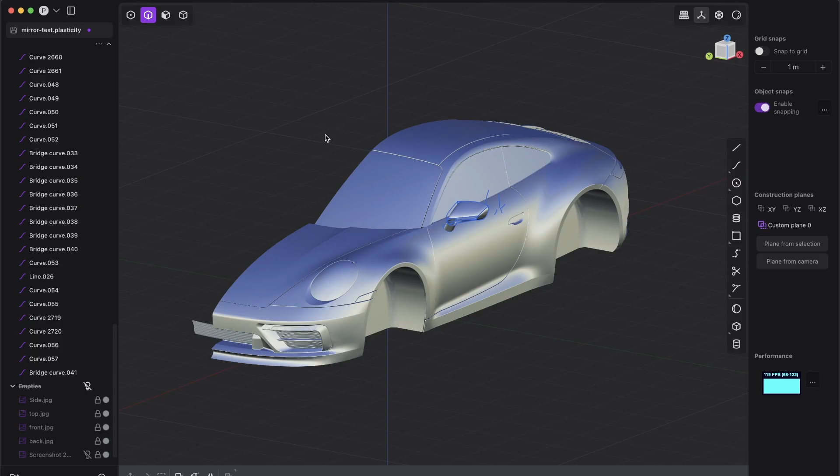But we have here this, I don't know, it's such a beautiful design. Look how organic this is, it's such a beautiful thing. And the interesting thing is, so if we check out, and just let me hide all of those curves. So here you see we have created already this beautiful smooth shape and everything looks super nice and organic and connected, right?

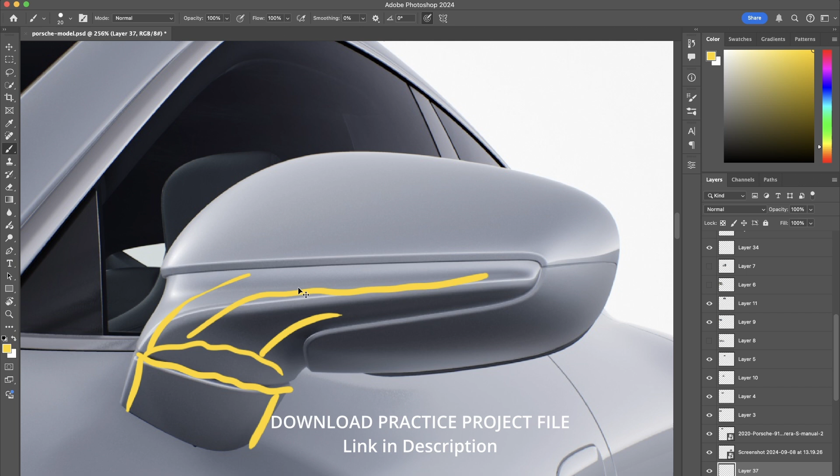And now, before I connect this holding piece, what we have already created here, we have this thing here, right? And we have that thing on the top, and this piece to connect, this is such fun because look, we have so much surface depth and interesting shapes. But anyway, we have our outer mirror here, but you see we have this little chamfer here, right? And this is extremely important because without this chamfer this wouldn't look so good.

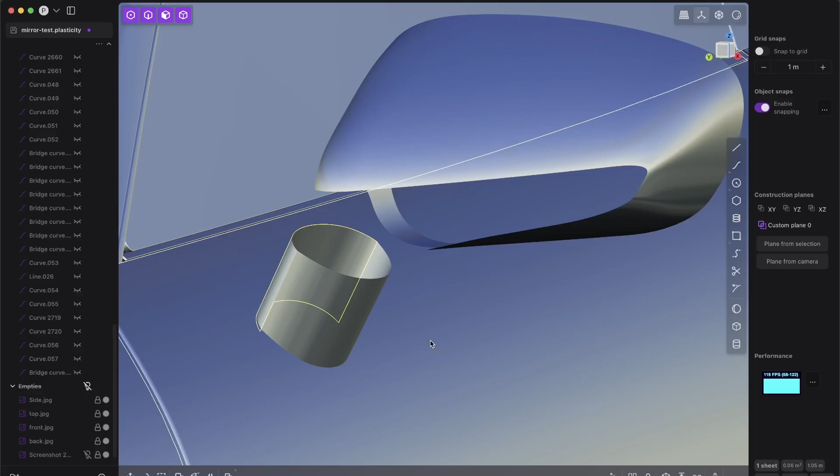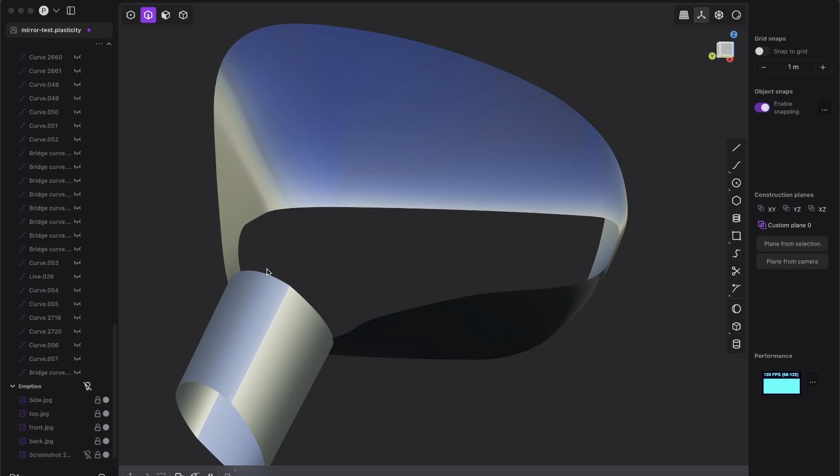And this chamfer goes all around the round complex surface, right? So exactly what we have here. Let me hide our car and all of its pieces. And right, we have this massive complex edge ongoing. So how can you add now this chamfer? How can we add this perfect little detail that will go completely all around with one clean surface? So you can just pause the video and try to think.

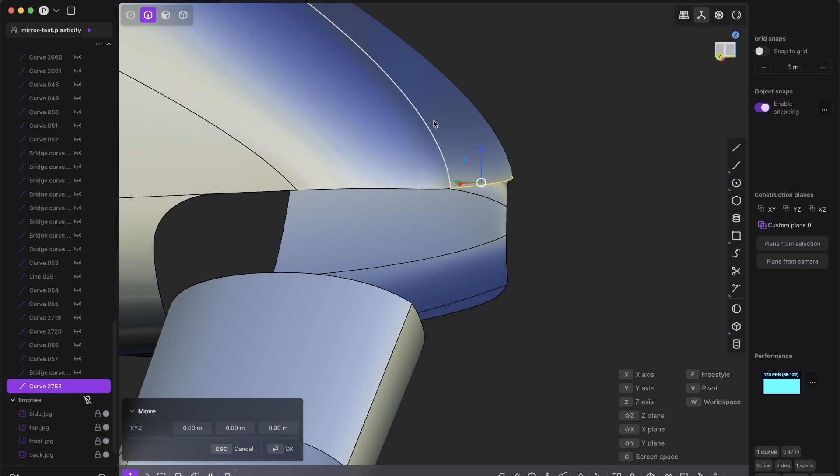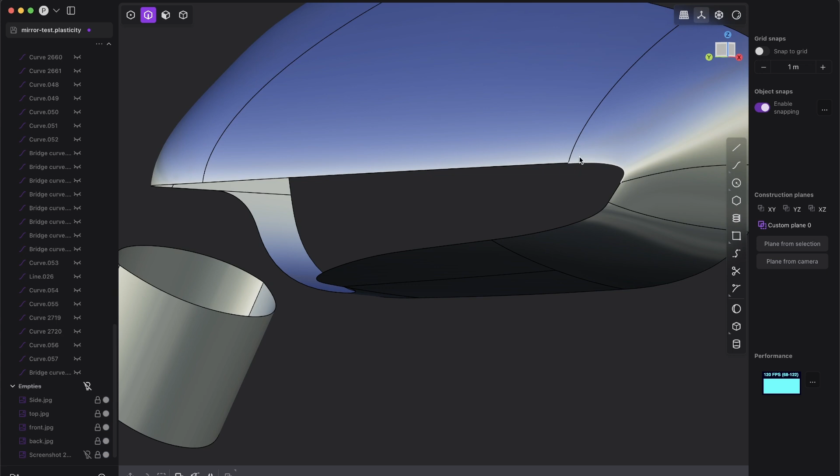And maybe someone starts to think, I don't even know where to start. Maybe I have to create this surface first and then maybe I can offset and then I can chamfer or something. Or maybe I will just duplicate this curve and then offset that and then start to chamfer that, and maybe I have to do it here as well and go one by one. Then it will take you till Christmas and you will not get one super continuous clean surface because the distance will always be off.

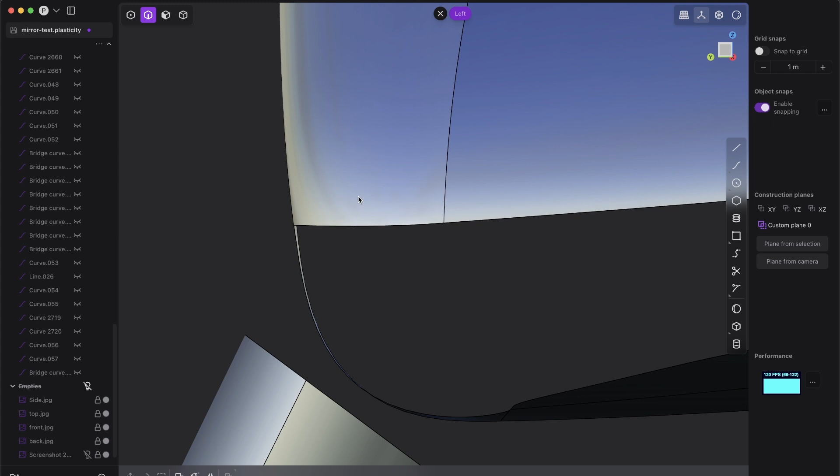So an absolutely amazing trick that I will show you here. And you can use that always, or most of the time, for such complex edge flow and organic surfaces. So we want to create a little line. So I will create a line, and I just snap to any point, doesn't matter where. So I just snap it here. And I will just kind of create the profile of our little chamfer. So something like that, right?

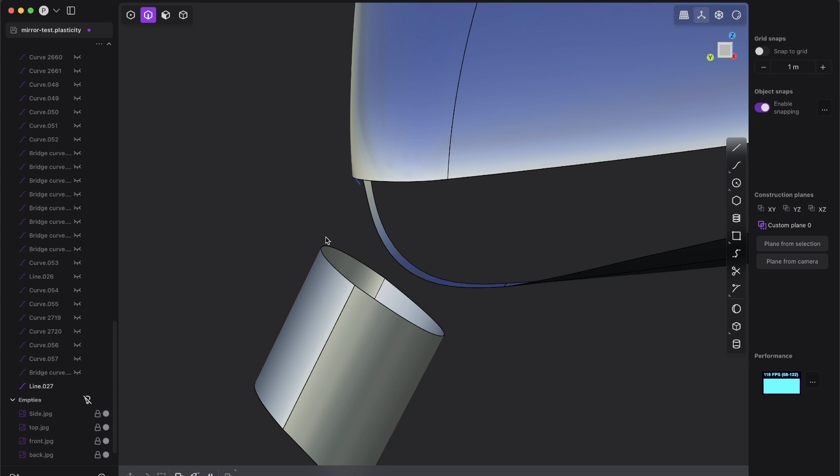And now I just want this profile to go all around that nice edge. But how can we do that? So maybe someone thinks, oh okay, I can just select this edge here and duplicate it with Shift D. Then I can just sweep it, bam. If you thought this way, then you are not so far away because it's almost what we will do, but you can't just sweep that around, right? Because again, this is way too complex an edge flow.

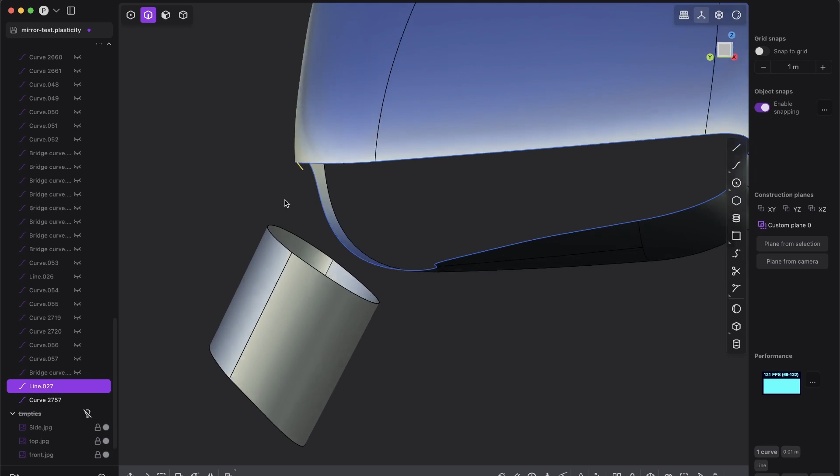So what we want to do is select this edge that we just duplicated and unjoin. So Alt J, and now we have all of those separate pieces. And now we want to just break it down into 2 or 3 pieces. So I will select a few of those pieces. So yeah, I think something like that.

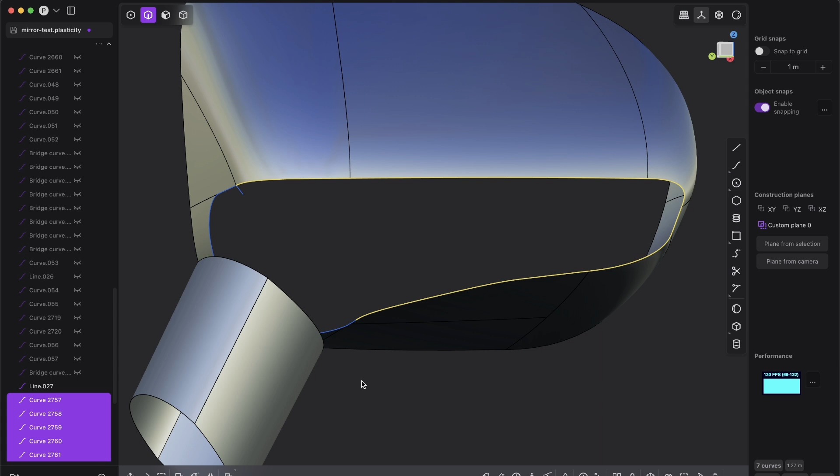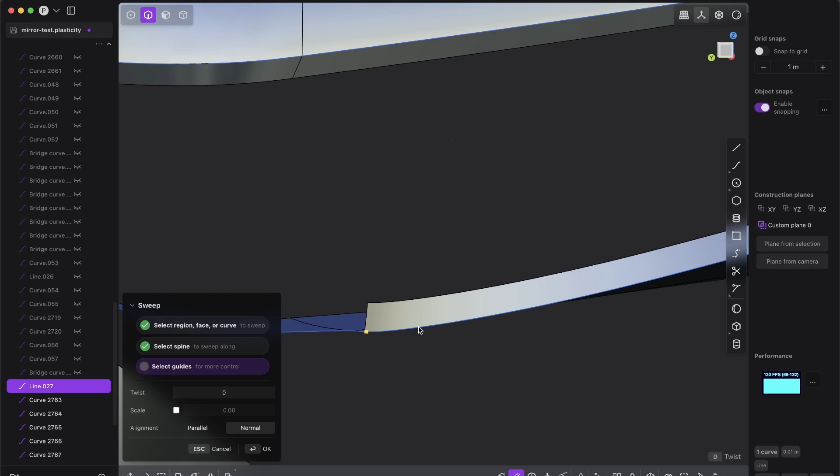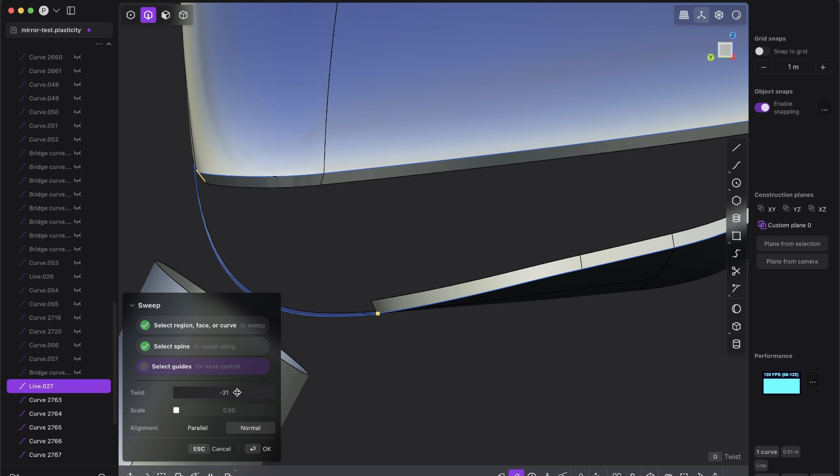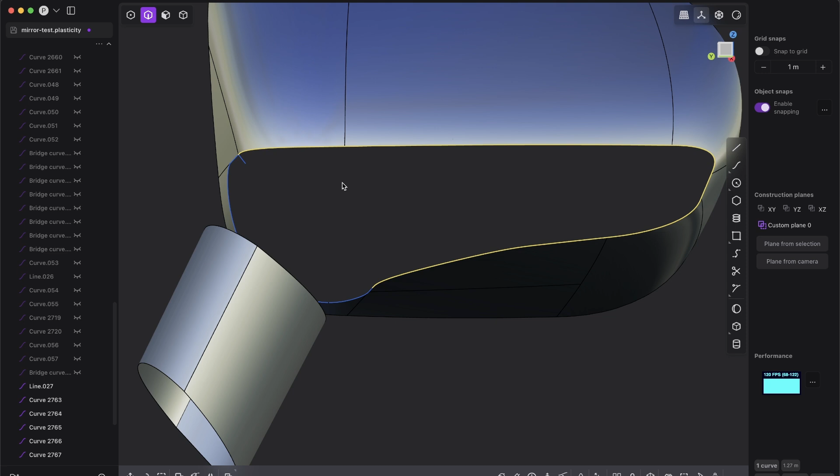So for that, we have a beautiful option here to twist it. And now we can twist it. And also, just one note: in many cases, the twist doesn't work. And it doesn't work because the original edge was not clean enough. It was not G1 or G2 continuous. If you check out our edge here, it's everywhere G1 or G2 continuity, because all of our surfaces are perfectly smoothly connected together. And that's why if you sweep it, we can give here in this example without any problems a twist.

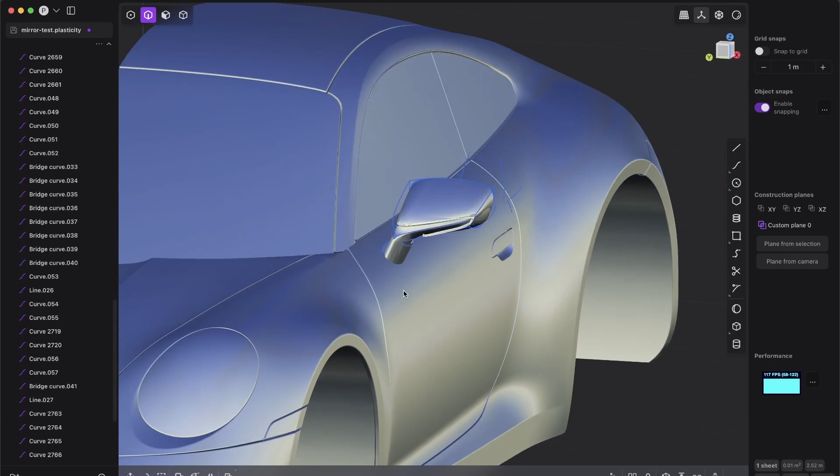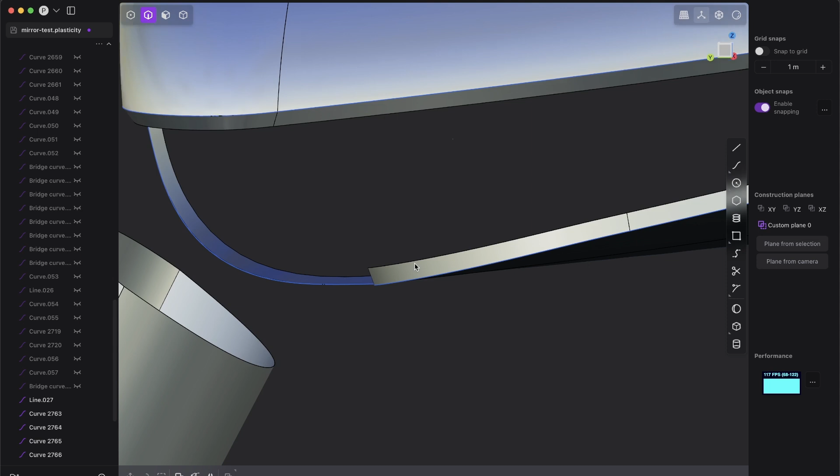And this is the whole point, guys. I don't teach you just random beginner techniques and random stuff. I teach you stuff that really works. From the beginning on, as I told you here, we set up the edges, the cuts, the surfaces in a way that even such a complex operation like a twist on such a conic shape works. So we can give here our little twist. And you see, we don't have any problems. So we can press OK. And let's just delete this curve here.

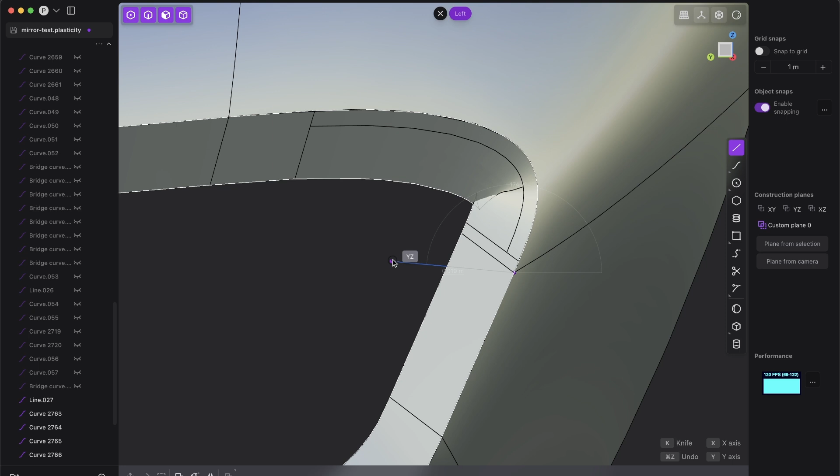But now we have this mess here, because we have this sharp corner here, kind of, right? So we have to fix that. And that's also very simple to fix. We can just create a line and go here where our mess starts, and we just cut a piece away. So we imprint this onto our surface here, delete the curve, and now we just delete all that mess.

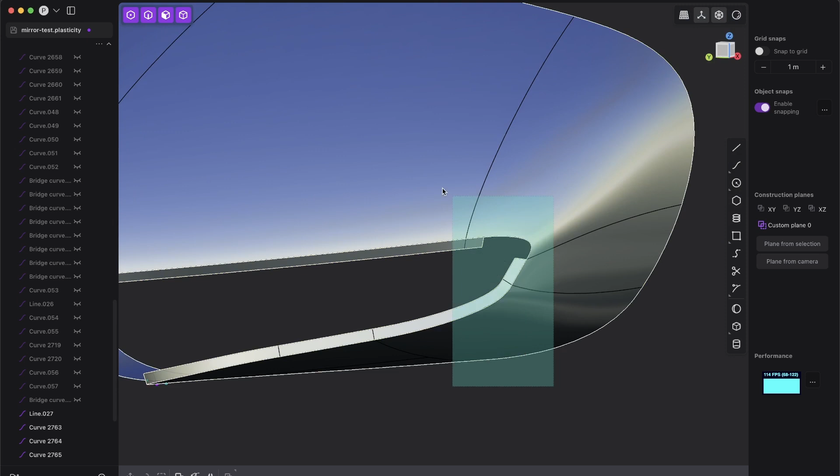And so this is the beauty of surface modeling. That's why I love to teach it to you so much, because only with these techniques and workflows you literally can solve any problem. You can create any surface, because look, we had this super crazy stuff going on, but we can just delete it. Now we can join all of those surfaces, and look, just 2 steps to fix it.

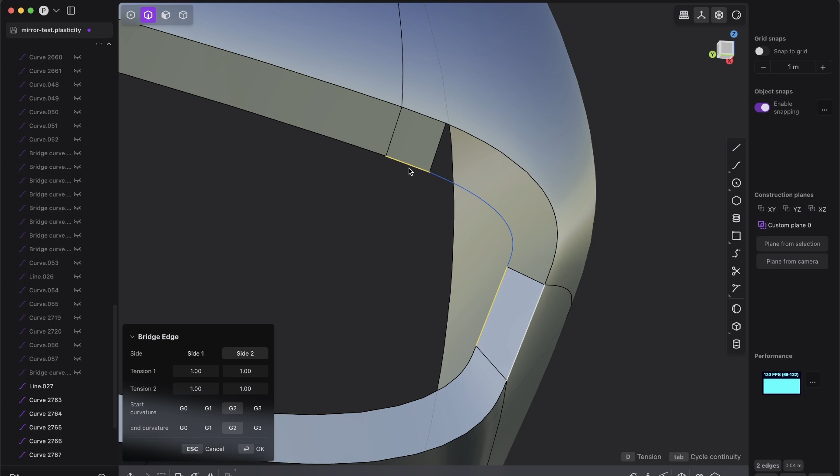We just select this edge and this edge, and we just click bridge edge, right? So Shift B command for me. So we just bridge them. The bridge edge command, I have it on a shortcut. And look, we already have a perfect curve, which follows exactly the shape. So that was step 1. And step 2 is we just loft that. We loft, tab, G0, shift, and shift. And voila. It took us 5 seconds, and we have an absolutely amazing, beautiful surface.

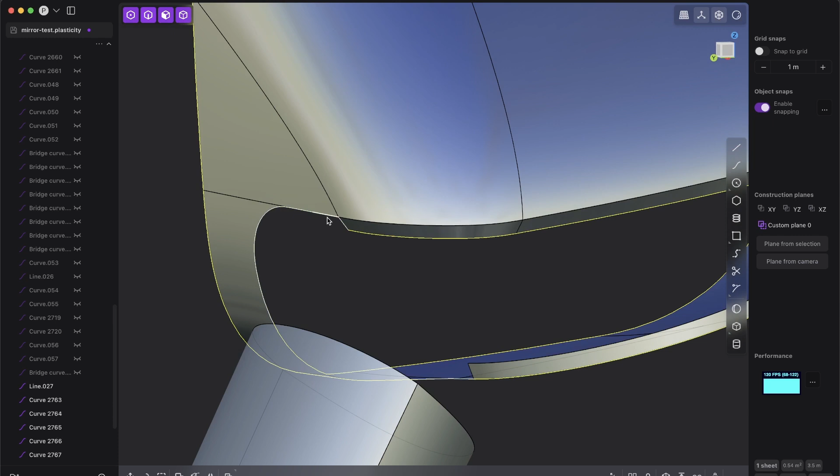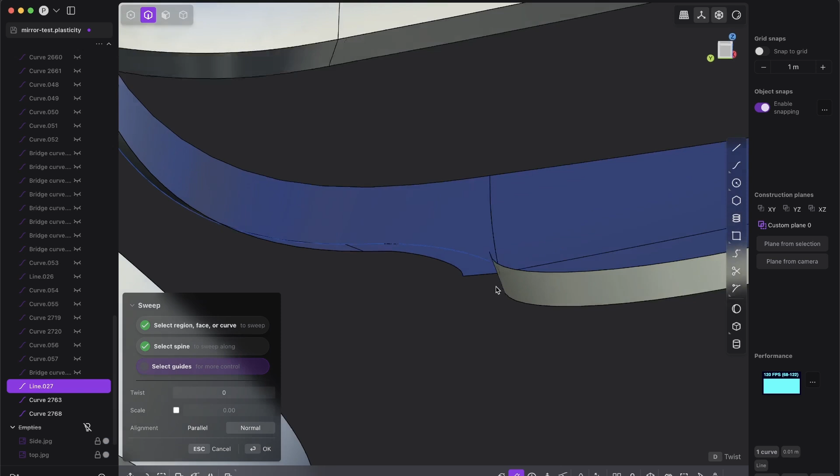So let's go and fix the rest here. We go to our second half of the curve and join all of those pieces, except this one little piece. I will show you why. So let's join those with J. And again, let's sweep it. Bam. And you see it works again perfectly, and it's nicely aligned at the top. But here again, at the end, you see it goes a little bit in the wrong direction.

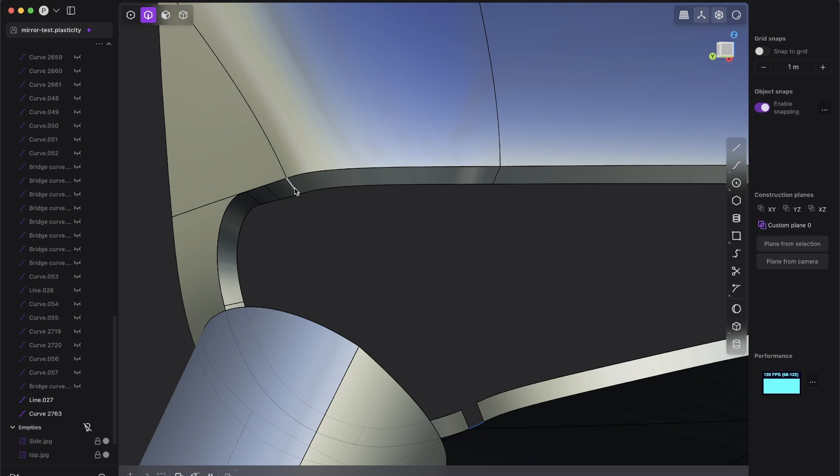So again, we can just twist it. And in this example, look, it's absolutely not a problem, because again, everything is connected in G1 and G2. We just have to adjust it a little bit to the same angle. So yeah, something like that. Okay, let's delete the curve and let's join everything. So let's join. And you see we don't have any problems.

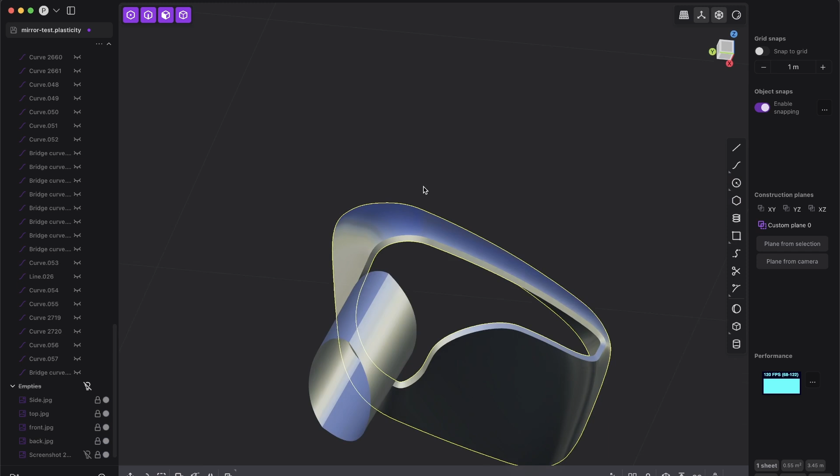And here, super simple, we just select those 2 edges, Shift B, bridge edge with G1 continuity. And here select this and loft, shift, shift. And bam, bam, bam. Let's delete that. Let's join that. And look, guys, we have an absolutely amazing, beautiful chamfer. And now starts the real fun. Now we can start to fill these holes and loft everything step by step and really go deep into surface modeling.